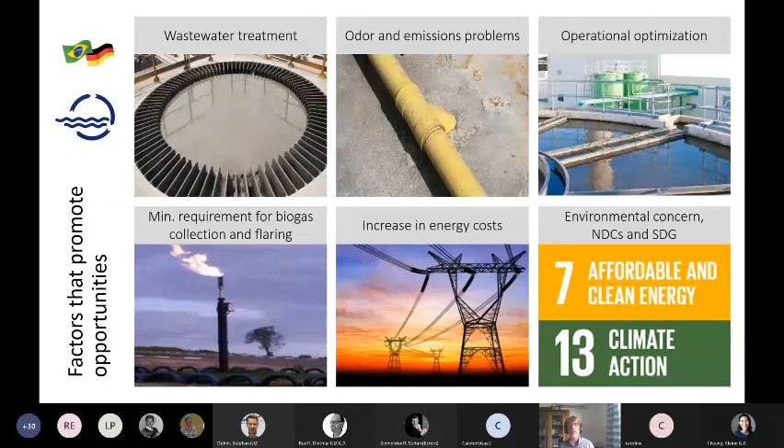So we as consultants see perfectly that SDGs 7, affordable and clean energy, and 13, climate action, could be attended by the use of biogas. So the expectations you have on that are very high. And really, it's a total win-win-win situation, because you could use the biogas to enhance sludge drying, to reduce sludge volume, to save sanitary landfill disposal.

You could use the biogas to bring down the CO2 footprint, to reduce the costs of sludge management, to reduce electricity costs. And we did some calculations here in Brazil. We are able, theoretically, to have plants of about 100,000 person equivalent and above in a zero emission situation, because we can produce the biogas we need to have the electricity to do the aeration in the activated sludge plant. So it's really very, very interesting.

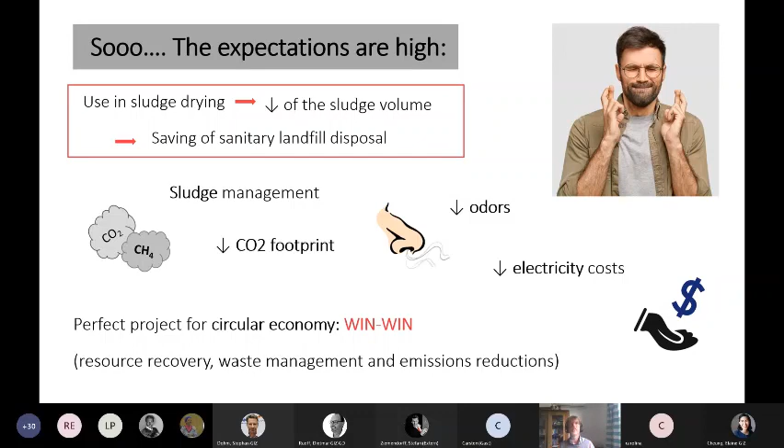But there's a really large but. First, size matters absolutely. In my day-to-day business, we have a lot of people coming to us thinking that you could do biogas production for a small condominium, and then you can produce energy, and then you might be able to reduce your energy bill. That's absolutely not the case.

Small wastewater treatment plants, or also industrial production, swine manure, whatever plants, cannot produce enough biogas to produce an energy which pays for the generator. So very often in the pre-project they have high expectations, and these expectations start to disappear each day when you do financial calculations. And if you do these calculations based on local prices, then they disappear far more quickly.

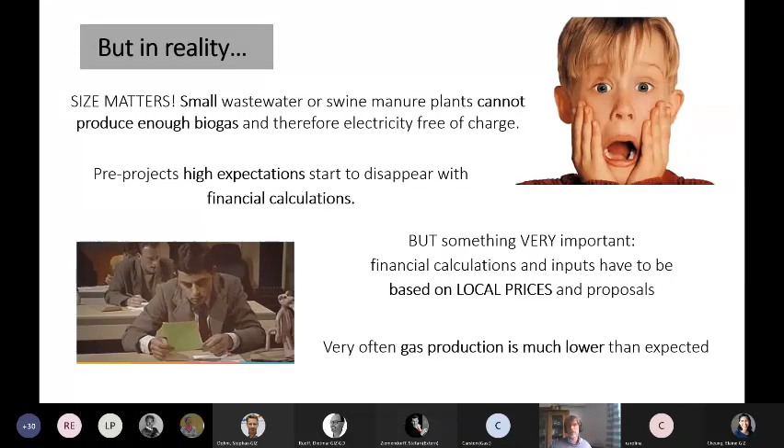And on top of that, Carolina will talk about this, very often the gas production is not as high as you thought, because you might have some venting in places you didn't expect. We had to learn some lessons, and we learned those from a full-scale R&D project where we did everything by the book. So we have a UASB with 100,000 person equivalent, and we used, let me see how I can get the pointer.

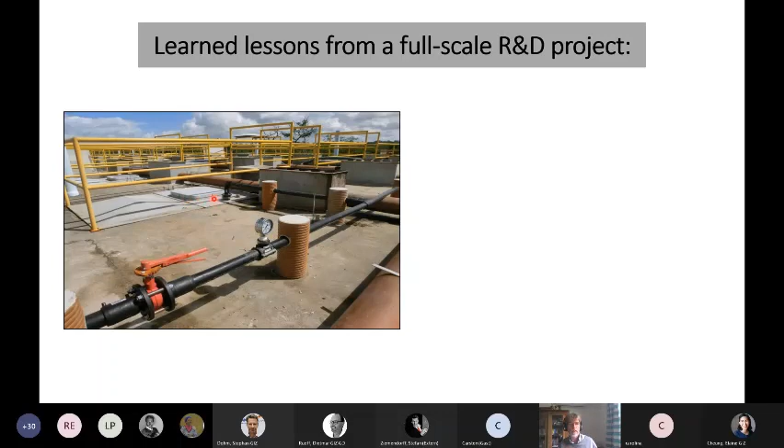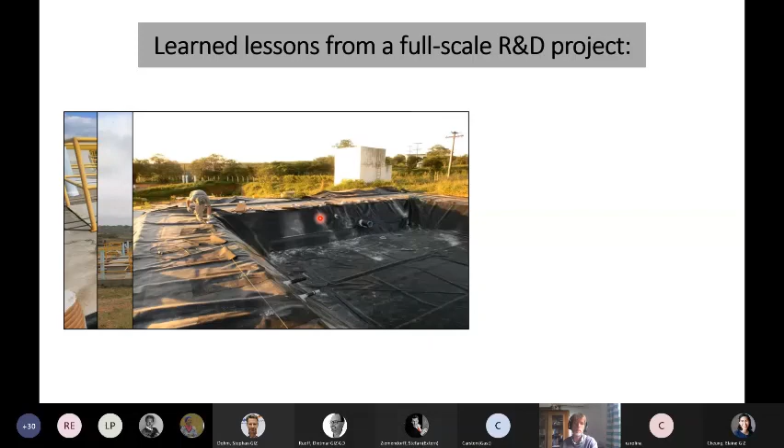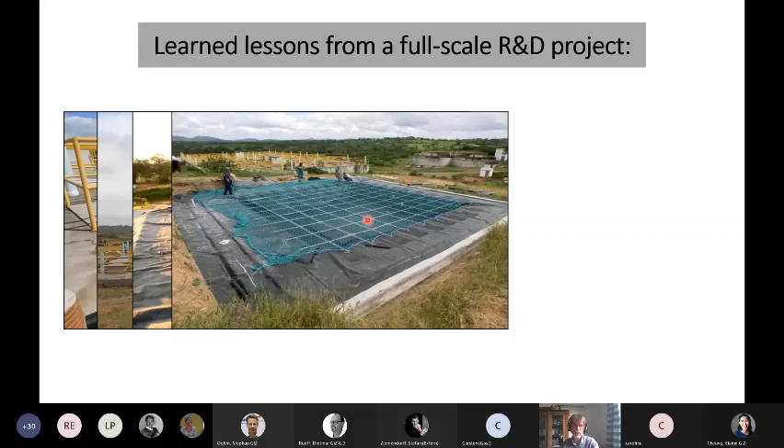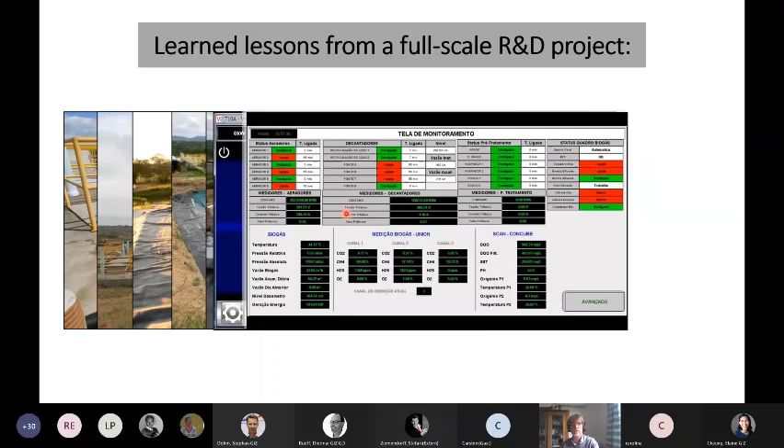We did a total encapsulation of the biogas with tight gas openings, and we did a piping of all the biogas. We installed a flare. We installed a biogas tank, which has internal biological H2S elimination with a double membrane reservoir, with total automation of the CHP, where we had all the numbers you need to operate perfectly by telemetry.

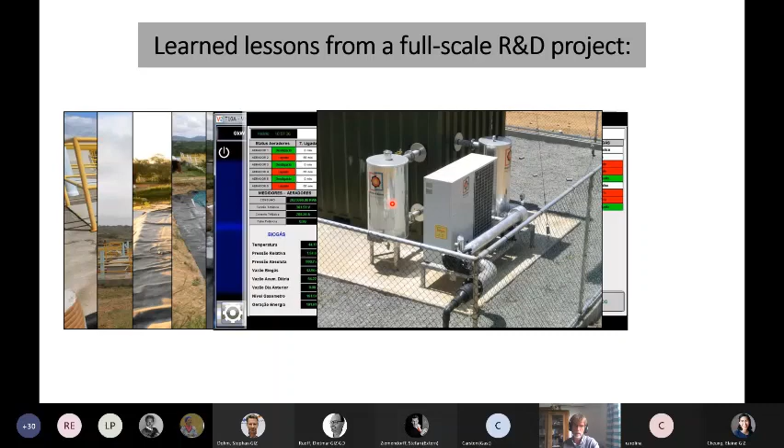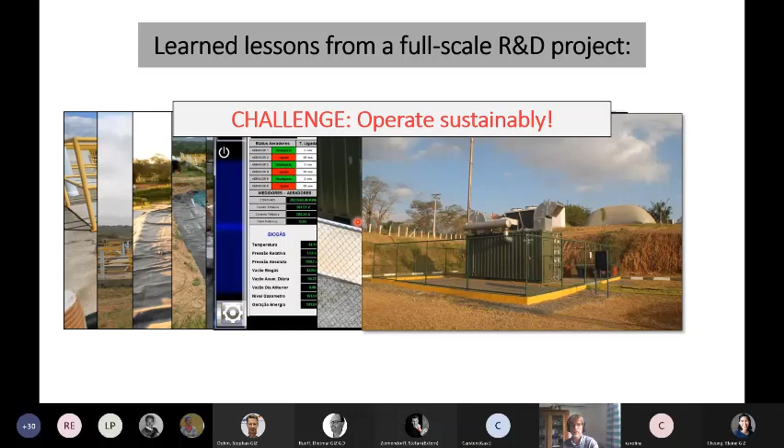We had a cooler for the biogas and an activated carbon post filter to reduce the H2S concentration even more. And then we had the CHP. Perfect setup, very well thought about everything. The challenge is how this operates sustainably. And to make the story short, today this total setup is not in operation. And it's very, very sad for us. There are a lot of challenges we didn't think about sufficiently.

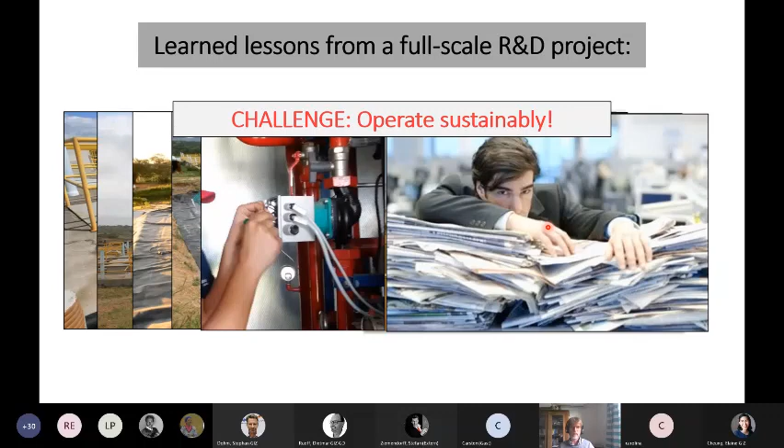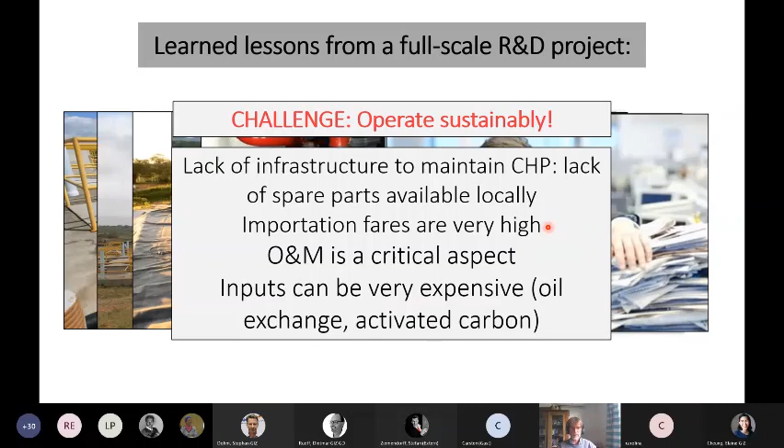And the main challenge is that operation and maintenance in a public service is a really critical aspect, because you have to have inputs which can be very expensive, and you have to do bidding for those. You need the activated carbon, you need the oil exchange, and repairs as well. So a very important aspect is you have to think about all these things together and not just the perfect setup. This one here is a plant for 100,000 PE with 180 liters per second, about a 200 kilowatt motor.

But we only had 37% of the expected methane quantity because we were not able to measure beforehand. So it's very important to be very conservative. If not, you have a motor which is not working, and not working means no money. No money means no payback. No payback means it's not economically viable.

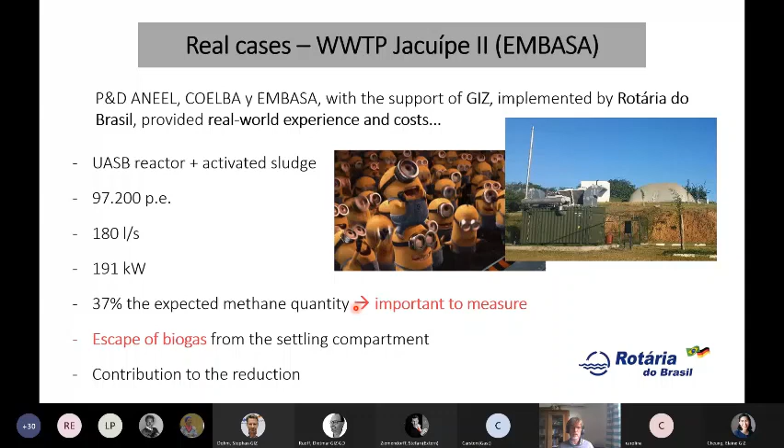So, and we underestimated the escape of biogas from the settling compartment. We were not able to correct it because we didn't enter into everything in the reactor. So transforming existing UASBs into gas-tight solutions is very, very challenging. And we had another experience which we underestimated.

This motor came from Germany and was working perfectly, but by lightning, we lost this pump here, which is a small pump you have in every household in Germany, and it takes you 1 day to change it in Germany. We needed 4 weeks to be able to supply this pump. And this was for 4 weeks, in a private area.

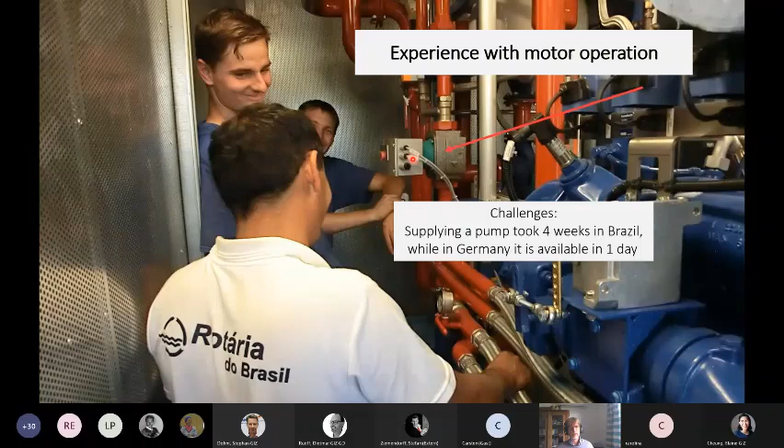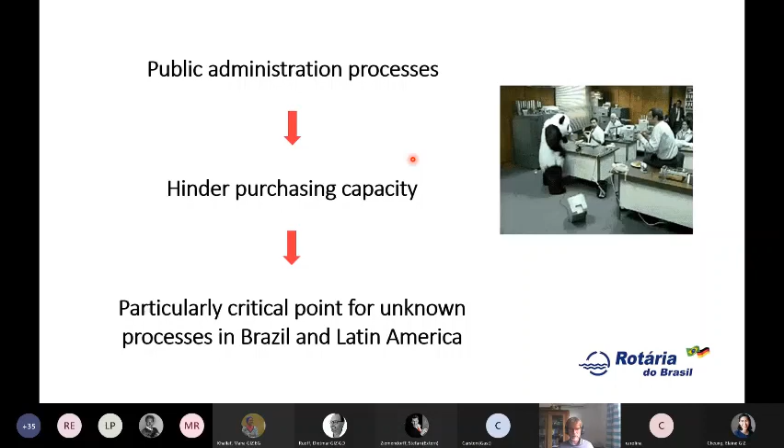If you do it in a public area, it's worse, because the public sector in Latin America has really, really difficult administration processes which hinder the purchasing capacity. You cannot underestimate that, because it's really a very critical point. So it's important to talk about the barriers we found, and we worked on that in a project, Pro Biogas, here in Brazil by GIZ, where we worked on all these barriers.

The national equipment manufacturers, you should always give preference to those, even though the quality might not be that good. But the price of importing is very, very high. You have to be very critical about that. It depends on the country, I know. And the technical knowledge, the commercial knowledge, and the legal information are really critical points.

The thing we did in Mexico with the GIZ project, Bentley will talk about, is really to set up horizontal exchange projects. And you need commercial scale reference projects. And these have to work on a long-term basis. So the financing, the back financing options of these projects are very important. And to be able to get public policies going, you need a strong biogas association.

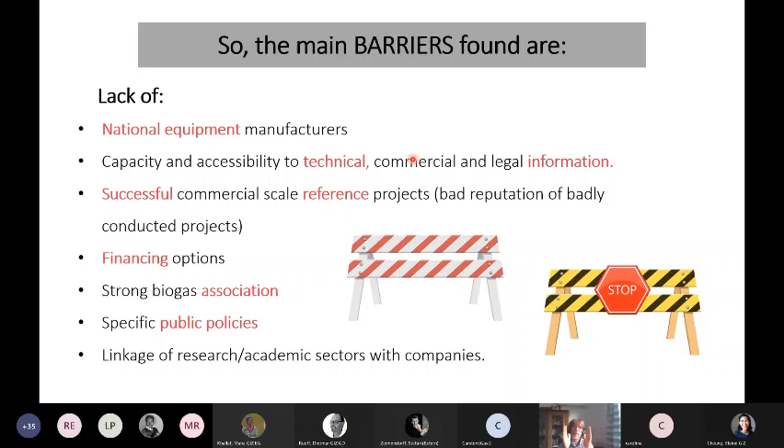Some of the proposals we made 5 or 7 years ago in this GIZ project here in Brazil I mentioned have only now been put into action, because until now, public policies were not able to overcome them. So all these barriers are critical to a successful biogas project. And very often the time frame you have in a GIZ project might be very short.

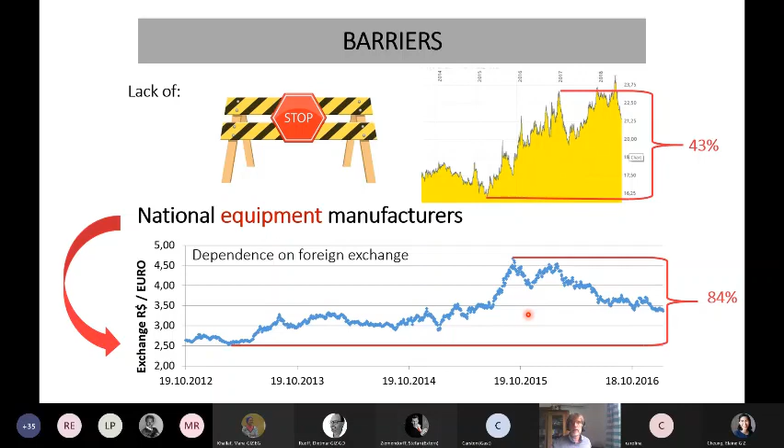And another point which I would like to mention is the currency exchange situation. If the currency in the country you're working in is not so strong or so stable, you can have a really large fluctuation. Here an example of 84% or 43% we had during this project, the R&D project in Bahia we mentioned. So all these problems together, we worked on those and on some solutions as well.

My personal opinion is that performance-based contracting is the best way to go, because then you have a contractor which is totally focused on getting most of the biogas into energy. And if you get most of the biogas into energy, you already have the climate aspect. And if you have somebody who really wants to operate the CHP most of the time, because he gets money from that, that's a perfect situation. So for the client, which might be a public company, that could be a very interesting solution.

We tried to implement that solution with Embasa in Bahia, and we have not been successful because of the processes: for something unknown, how can that be done in a water company? We have not been able to overcome these problems without external help. And I think in these cases, GIZ could be a very interesting catalyst to get these projects going. In my opinion, really, performance-based contracting is the only way to guarantee sustainability on a long-term basis.